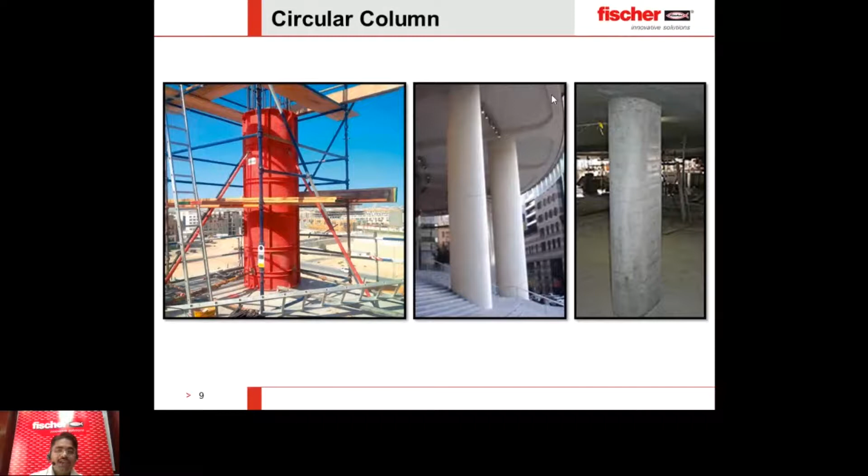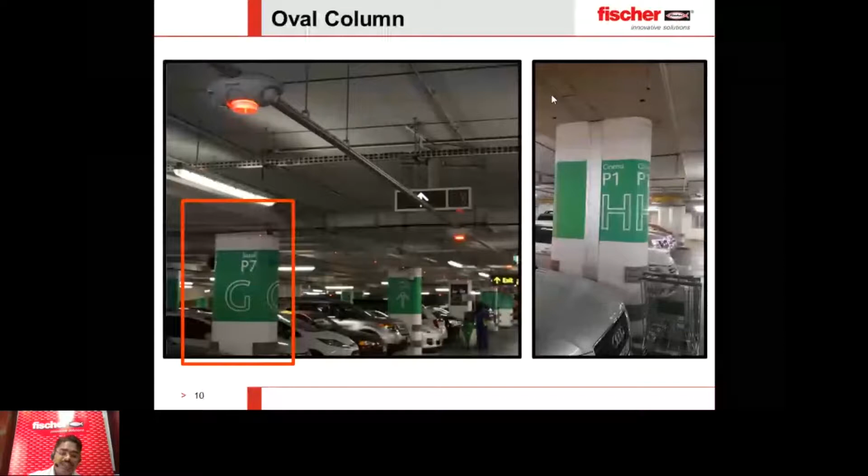But before I start that, I want to ask you: what type of anchor failure happens under tension? What do you think, guys? What are the types of anchor failure happening under tension?

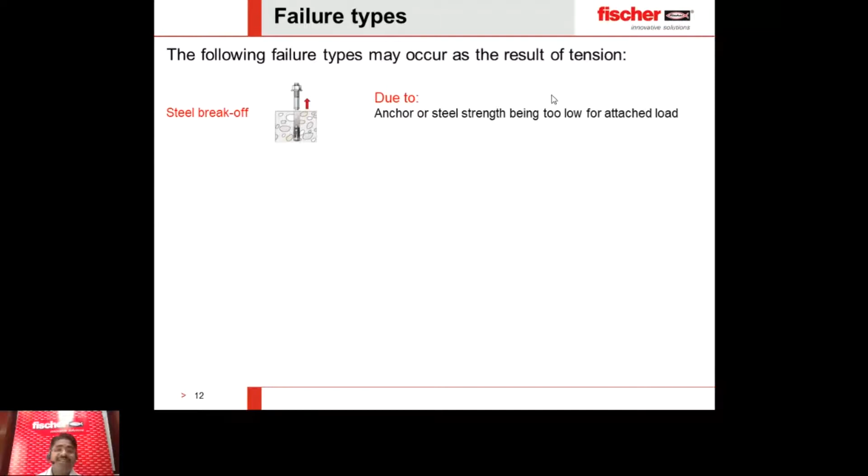Under tension, failures can be steel failure when the load is high and your steel diameter or anchor diameter is very less, then the steel will get failed. There is also anchor pull-off failure, which basically happens because of high load, incorrect installation most of the time, and if there is less bonding strength of the chemical to the anchor or to the concrete.

There is another failure, which is concrete cone failure. Even if our anchor is strong and steel diameter is big, if your concrete strength is very less, then concrete cone failure happens. Basically, the anchor comes out with a part of the concrete.

And there is splitting failure for thinner members. If you are using a very thin member and using anchors over there, when the load comes, the member itself gets split.

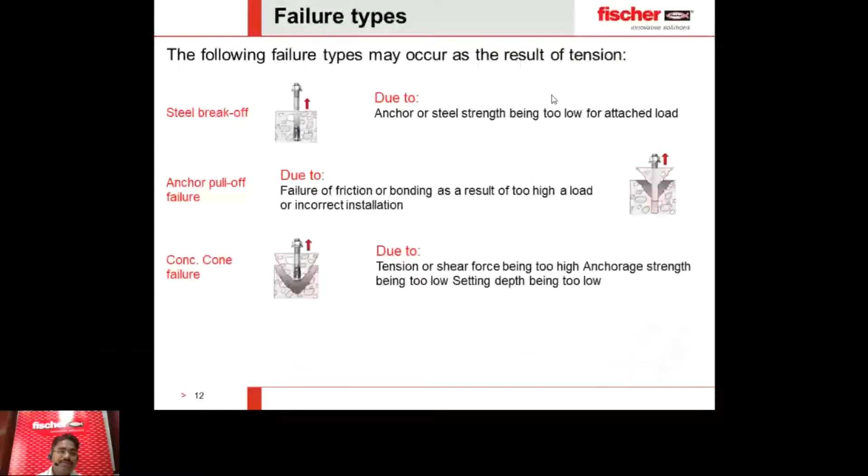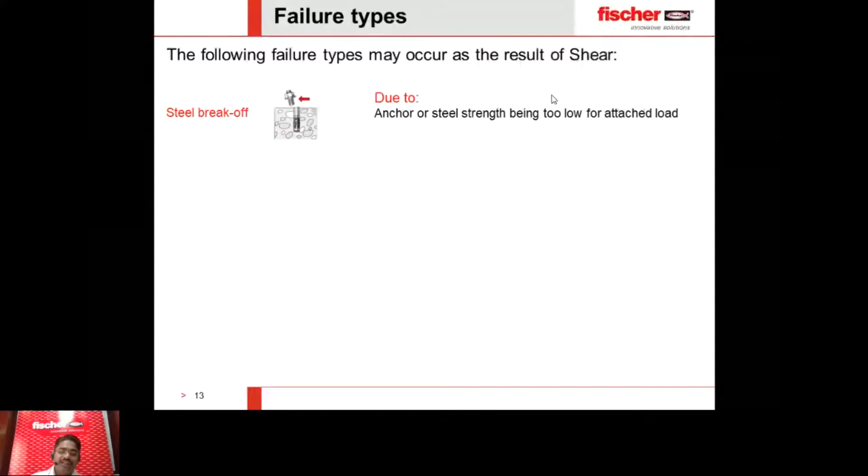Now, what is the failure type for shear? This is a very basic thing; we are going to discuss more deeply how we can find solutions for these problems. There is steel failure again - if the diameter is smaller than the required diameter, then the steel is failing.

Concrete pry-out failure - in the formula or theory, it's mentioned that it's based on anchor pull-out failure under tension, or the pull-out capacity. It depends on the pry-out capacity. So again, if anchor pull-out failure is happening, there's most chance the pry-out failure will occur too.

And concrete edge failure - this happens if the anchor is very near to the edge, for corner fixing. If that's the case, then concrete edge failure happens. So how we can avoid it and get a better solution, we will discuss in our future slide.

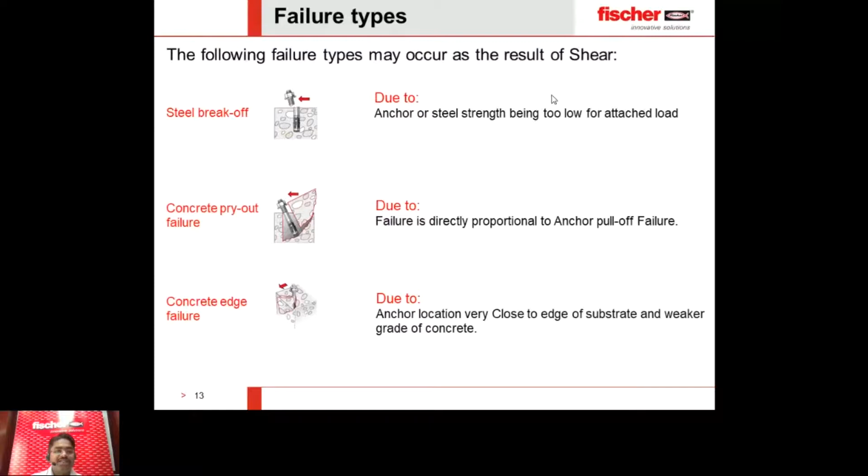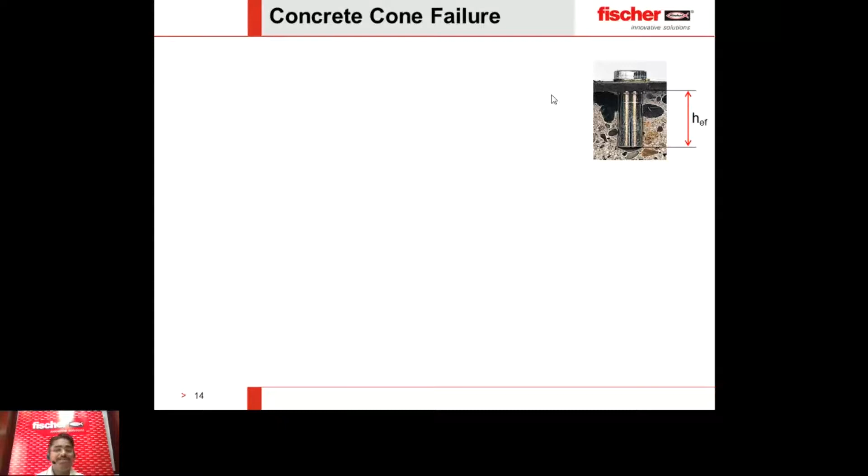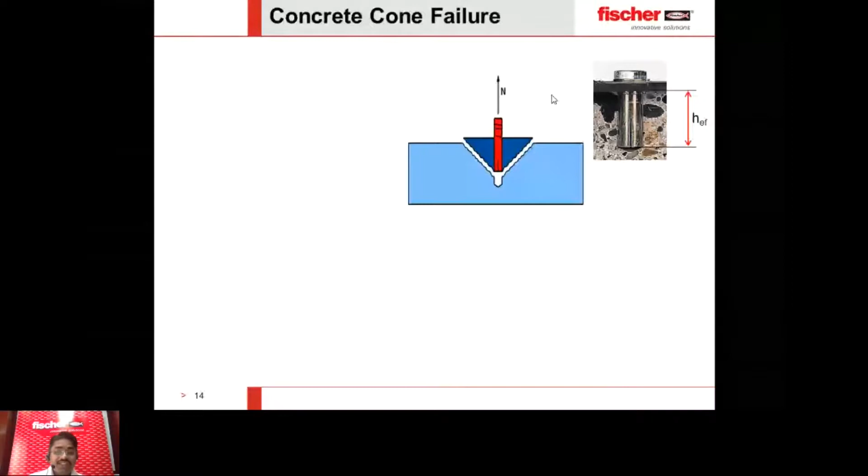So what is concrete cone failure? We know how an anchor works - it's basically embedded inside the concrete and then bolted from the top. The part embedded inside the concrete is called the effective embedment depth, in terms HEF, meaning H effective, or embedment depth. So when there is tension, if the concrete is weak but the anchor is very strong, then the concrete gets failed and comes out. What is the dimension of this concrete, how does it get failed?

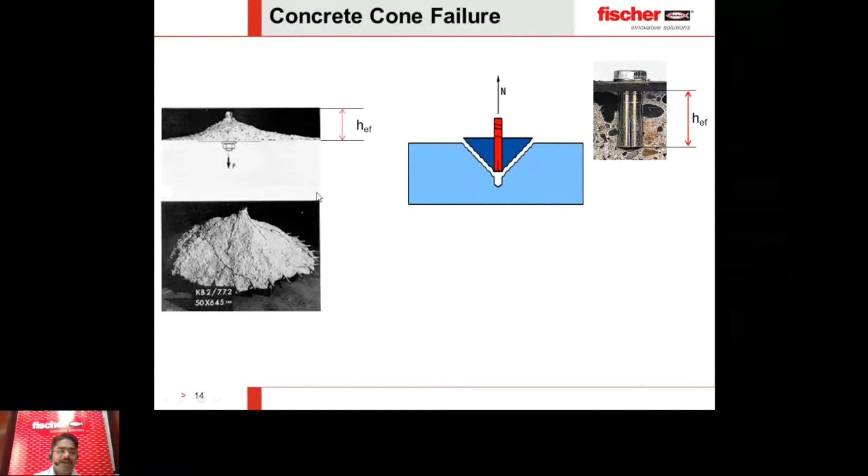This is a real picture of concrete cone failure, how it looks like. This is the embedment depth from the surface of the concrete till the end of the anchor - the effective embedment depth. Then the concrete surface, which makes the cone, or the cone surface, is 3 times the embedment depth. So if you have an embedment depth of 100 mm, you will have the diameter of the cone as 300 mm.

This is the theory, or the formula, for concrete cone failure. This is a constant value for cracked and non-cracked concrete, K1. This is FCK, the compressive strength of the concrete, and the embedment depth, HEF, to the power 1.5. So basically, concrete cone failure depends on the strength of the concrete and the embedment depth.

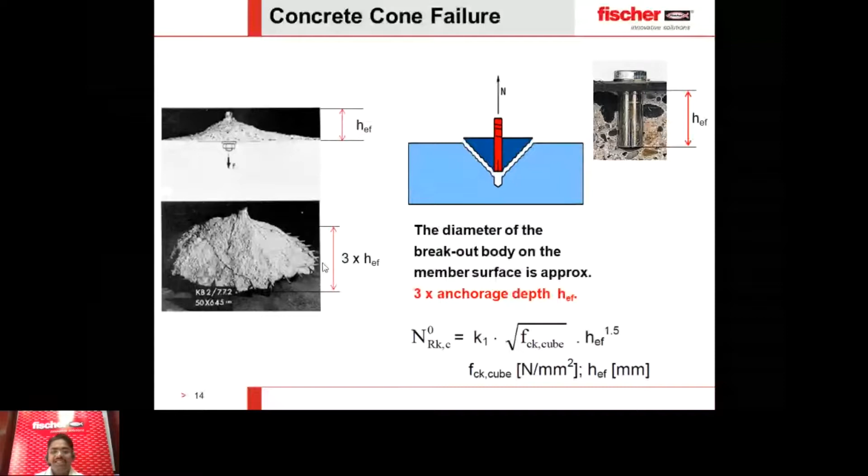What is characteristic spacing and edge distance? To get 100% capacity of the anchor in terms of concrete cone failure, you should keep the distance between two anchors as 3 times H effective, or 3 times the embedment depth. Then you will get 100% capacity of each anchor. If it is lesser - in the actual case it's not always possible, because when you have embedment depth of, say, 100 mm, you'd need spacing of 300 mm, which in actual site conditions is sometimes not possible. So as the spacing gets closer, the reduction factor starts working.

There is edge failure, which occurs at 1.5 times H effective. You can see here in the picture - this is the cone, so half of the cone is 1.5 times H effective. If the anchor is 1.5 times H effective far from the edge, then there will be no influence from the edge - which is sometimes not possible to keep on site. So let's see how we can make it possible and what will be the solution for it.

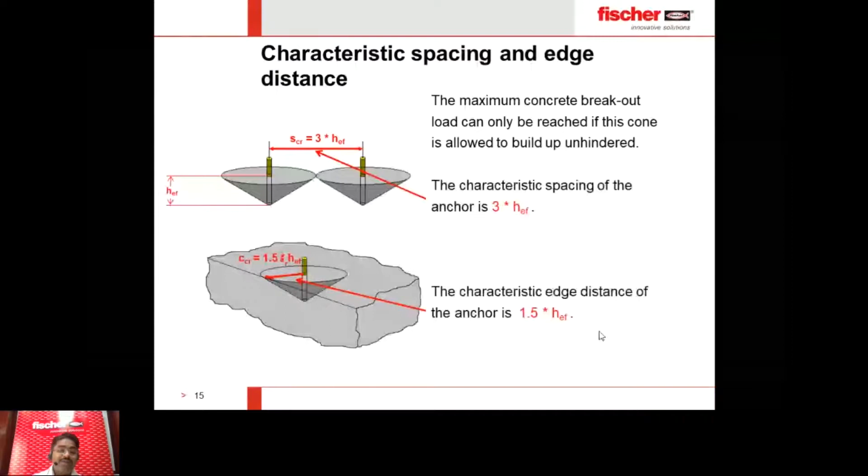Before that, I also want to talk about what is the anchor capacity influencer here. These are the anchor capacity influencers: even if the anchor is the strongest one, if your member width is very small, the anchor capacity reduces. Member thickness governs the splitting failure, so it also influences anchor capacity.

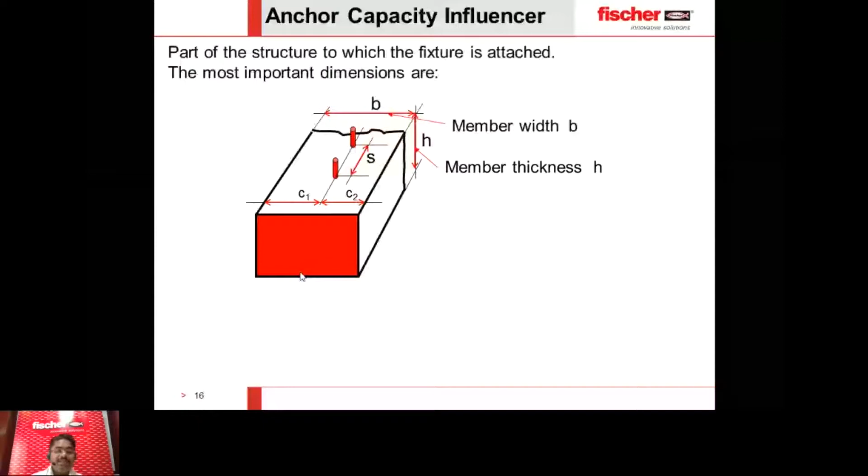Spacing between anchors, we already discussed how spacing influences anchor capacity. And edge distance is much more critical. If the edge distance is very small and you have a shear load, there will be a chance of edge failure. Anchorage depth is also playing a vital role in terms of edge failure, pry-out failure, concrete cone failure, all of this.

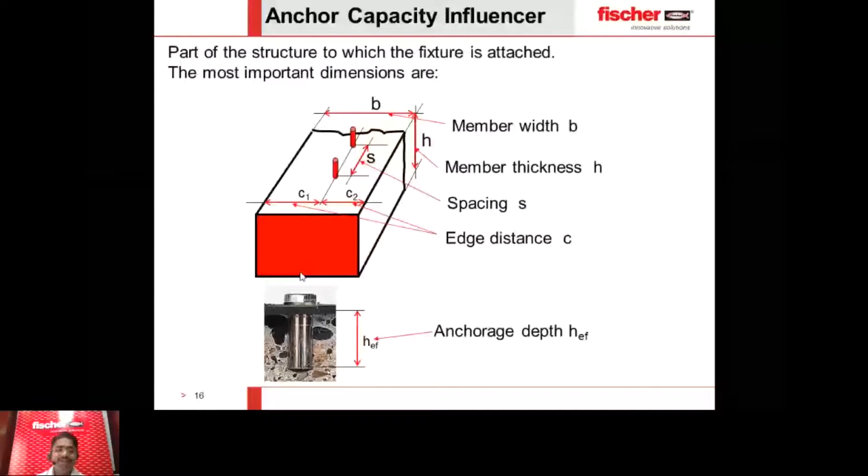So let's go towards the case study: fixing a steel beam on a curved column. It can be steel beams, or any kind of base plate you are fixing on a curved column, but how should the approach be, how will it be solved, and what is there.

Basically, there was a parking area in UAE, a project I worked on. There was parking on the first floor and parking on the second floor. But as this is a busy mall, the parking usage increased, so they wanted to introduce an intermediate slab in between. There will be some I-beams connecting from one column to another column, and then there is an intermediate slab, which can also be used as a parking lot.

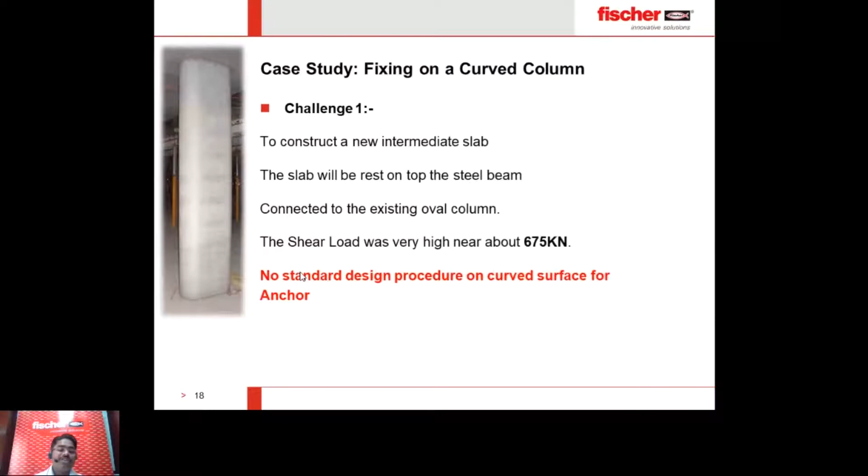Now, when we approached them and found the shear load for this beam connection to the column, it's coming to 675 kilonewton, which is 67.5 ton. It's a huge force, right, guys?

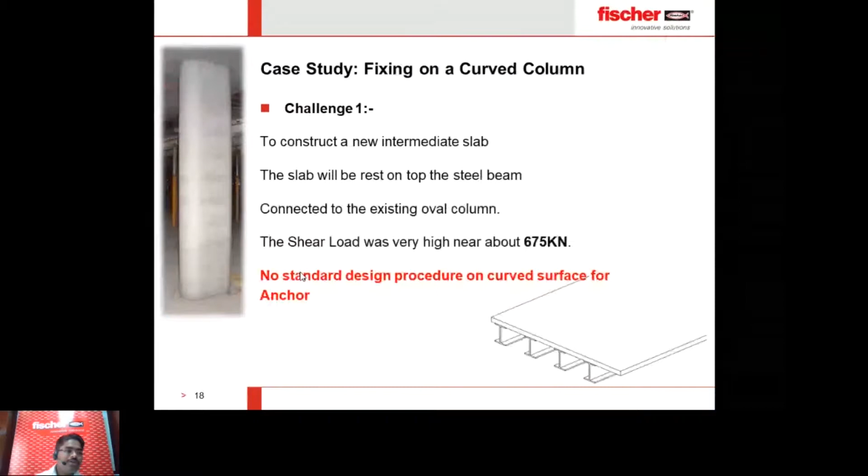Now, when we tried to approach a solution, we found there is no standard design procedure for the curved surface. How will we do the design calculation? Standard design calculations are always for a flat surface. So we came up with some engineering judgment and a solution.

What is that? So our first proposal was: this is a circular column. Now this is the cross section where you can see the anchor in green color. Let's say it's 85 mm embedded, and from one anchor end to another anchor end it's 90 mm. You can see it's a concentric anchor, because on the curve column, if you have to keep the anchor perpendicular to the surface, it's always concentric towards the center of the column.

So it can be circular, it can be oval also - oval is also part of the circle. So I am talking about basically the curved surface, how we'll do this. Here you can see the concrete cone forming, and the concrete cone is making a common area which is 3343.8 millimeter square with this particular dimension.

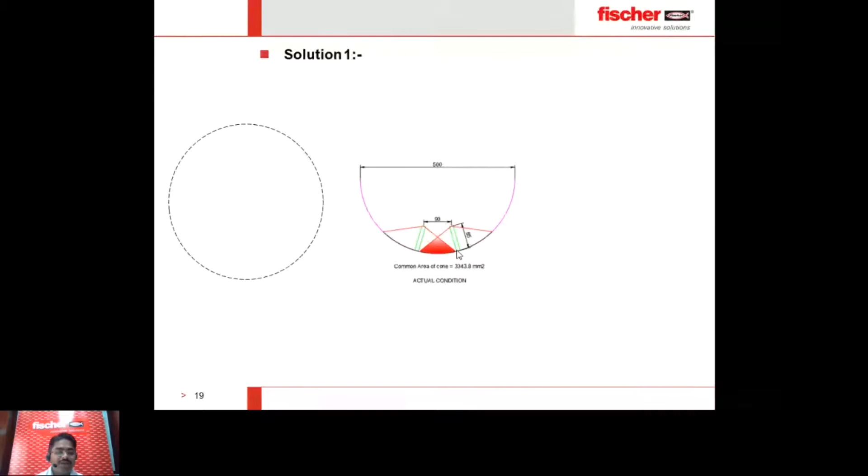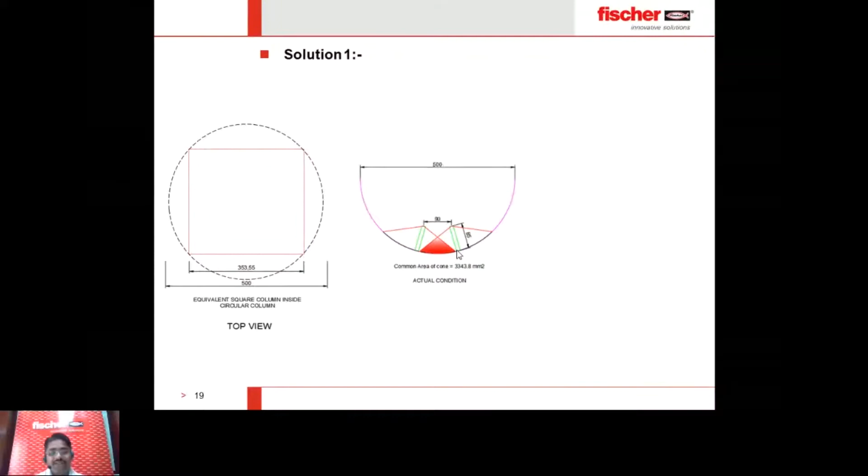Now we thought we will not go for that; we will go for a more conservative method so there will be no failure. To make sure of that, we consider a small square inside the circular column, and we consider there will be a straight anchor design. In actual case, the anchor will be concentric, but in the design method, to make it more conservative, we kept spacing of 90 mm on the flat surface, and I took the square column because the square column has limited edge, as well as giving more common area for the cone.

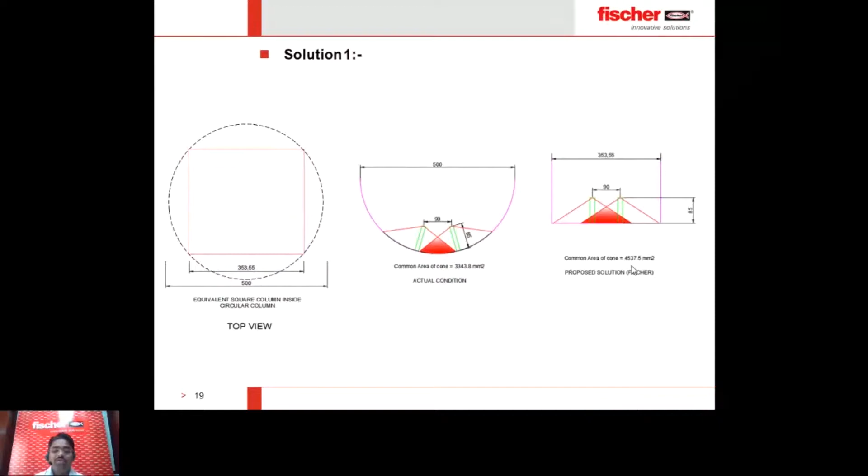As you see here, the common area for two cones is much more compared to here, and I found its common area is 4537.5 millimeter square, which is almost 1.4 to 1.5 times. So for solution one, why did we go with the square concept? Because there is limited edge, whereas for the circular surface there is no limited edge, it's basically a continuous surface. So there is limited edge in the square column, and the design is much more conservative.

But we face a problem. Remember there was a huge shear force, 675 kilonewton. When there is 675 kilonewton of shear force, what will happen? It will break the edge - edge failure will happen. And this is a column which is really high strength for a big building, consisting of so many reinforcements. So how can we approach this in a much more real way?

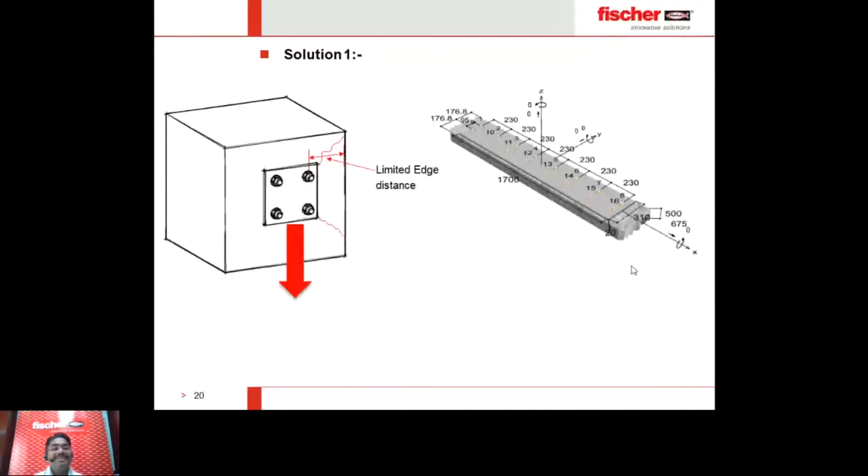We started thinking about it, and we found a solution which can be something like this. What is this? Okay, this is the real case scenario. Actually, we did a finite element design for the base plate with nodes mentioned as the anchor.

When we put the load on the finite element design for the base plate, we found some load coming on the anchor. This anchor load, we took every anchor load and did the design for a single anchor. Why? If the cone is not making a common area for failure, you can take the single anchor capacity as 100%. So from one anchor to another, I kept the distance as 3 times H effective, meaning there's no common area for the cone influencing each anchor capacity.

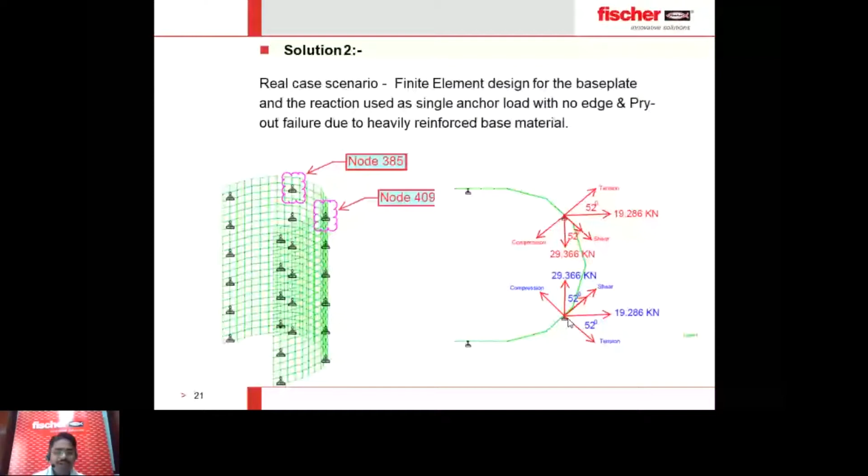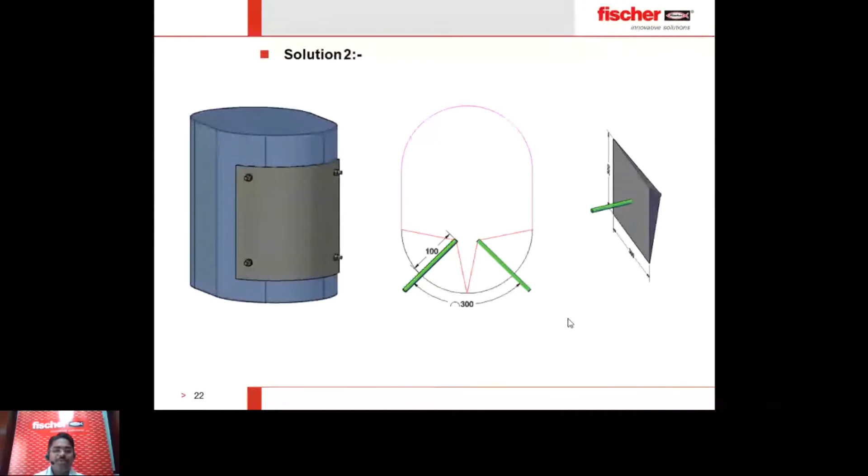So I went with a solution like this: there's a base plate, and going inside the concrete, it's basically a trial and error method. You go 100 mm deep, and it gives you a certain load capacity. Based on that, we do the finite element design, keeping 300 mm spacing between anchors, and check if the action load is exceeding the capacity or not. If it is, we increase the embedment depth to maybe 120 mm or 150 mm, and cross-check again with 150 mm, 450 mm spacing. Based on this we found the solution and got it approved - an awesome landmark milestone for us. Both consultant and contractor approved it, and I feel this is the best approach for curved surfaces: increasing embedment depth and keeping spacing between two anchors as 3 times H effective.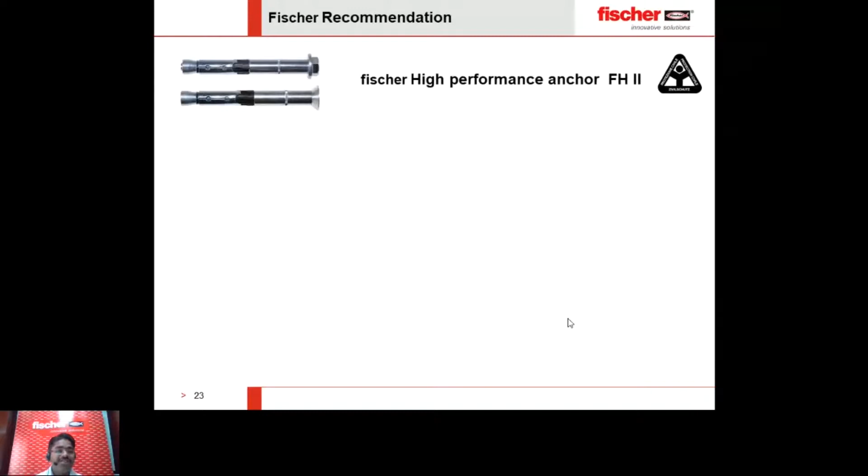Our recommendation for this anchor is the high performance anchor FH2, which has shockproof approval and better shear capacity because it's a sleeve anchor. If this anchor doesn't work, there's Fischer Superbond FIS SB390S, which is a hybrid mortar. It can work for short-term temperatures of 150 degrees centigrade. If there's any provision for temperature, you can go with this anchor. This is also fast curing.

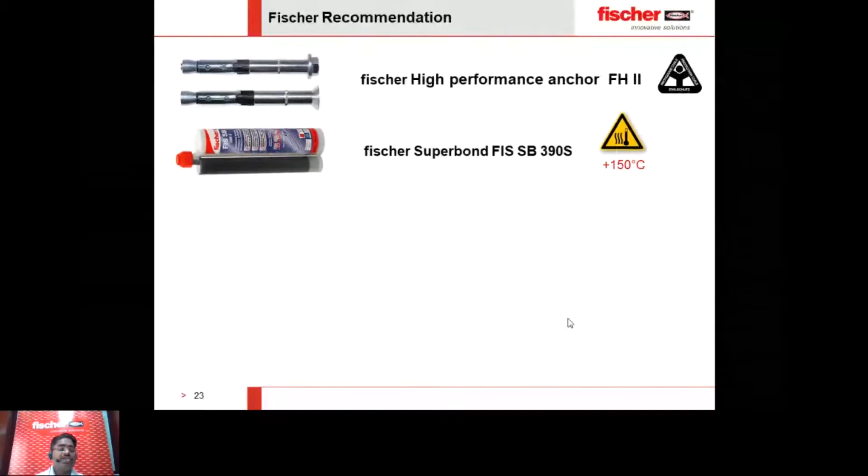There's also Fischer epoxy mortar, which I want to suggest - it's the best epoxy mortar in the market till now. It takes much more load, and the capacity of this anchor is very high. It's approved for a 120-year service life guarantee. This chemical is slow curing, so if you have much more embedment depth, you can go with this chemical.

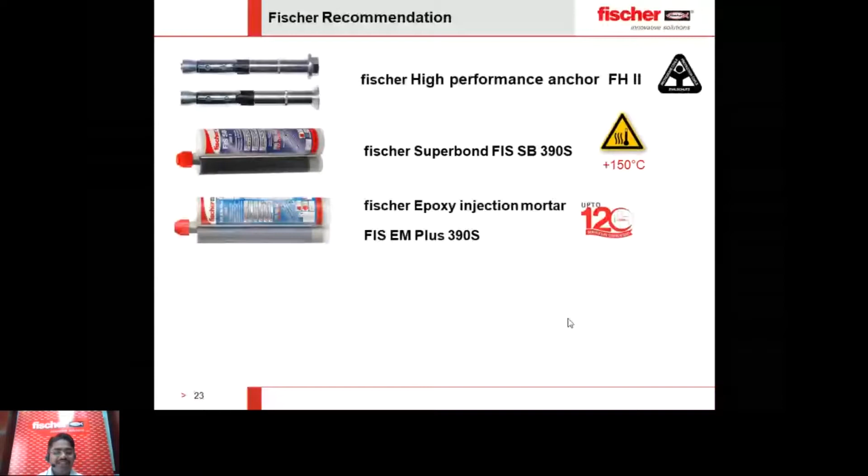And last but not least, to complete the limitations of the anchors - the most superior or most advisable for this particular application is the Fischer High Bond anchor. It's a high strength chemical anchor, and it really requires less edge distance and less spacing if you're doing design for other cases as well.

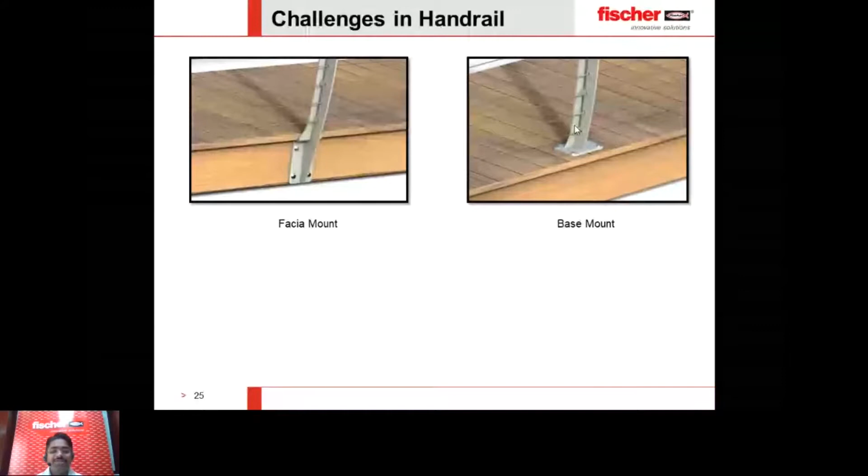Now our second case study: the top edge of the slab fixing bracket. Why do you fix a bracket on the top edge of the slab? For fixing handrails or guardrails, something like that. There are two types of fixing for handrails naturally happening: either fascia mount, which is fixing on the face of the slab, or base mount, which is fixing on top of the slab. When there's high shear load or high tension load, sometimes structural designers go with a solution that looks like this.

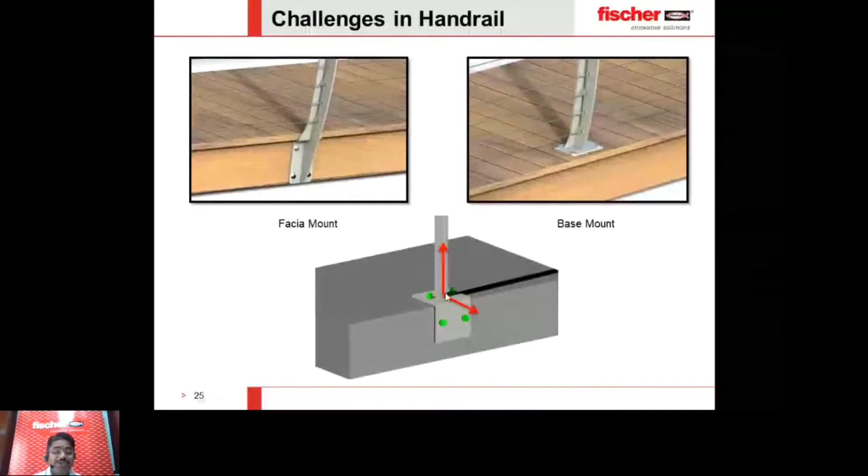Agree? When you go with a solution like this, the problem we face is this L-shaped base plate. This anchor is working both in tension and shear, and this anchor is also working both in tension and shear. How do we resolve this? This is a big challenge for high tension force or high shear force, as well as being near the edge of the concrete. How will we resolve this problem? Let's see.

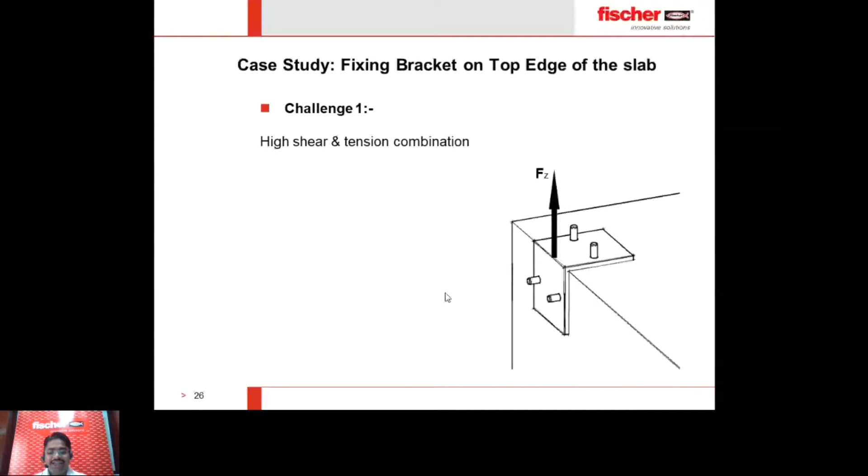This is the tension and shear combination I talked about just now. If there is vertical load, upward load as tension on the handrail, you are going to get tension on this anchor and shear on this anchor. So basically this anchor will be under tension because of this load, and this anchor will be in shear at the same time. So this edge becomes weaker in terms of cone and edge failure. We will come to the analysis. And when there is Fx working, there is tension in this anchor and shear in this anchor. So again, this edge is becoming worse in terms of Fx.

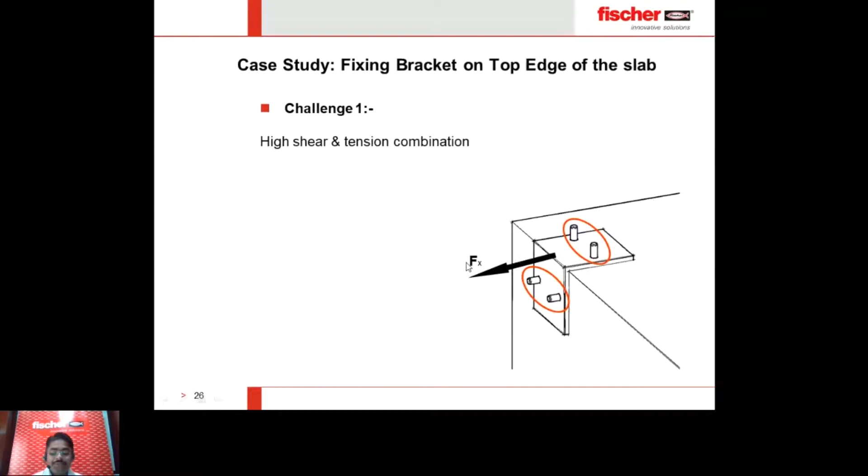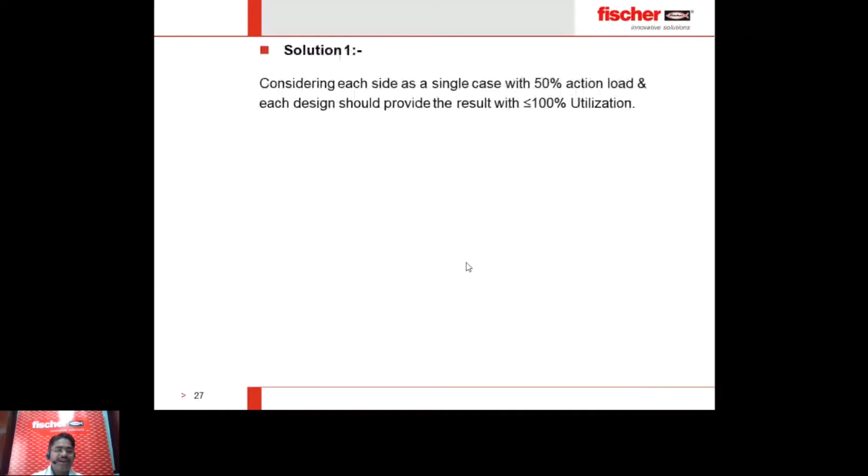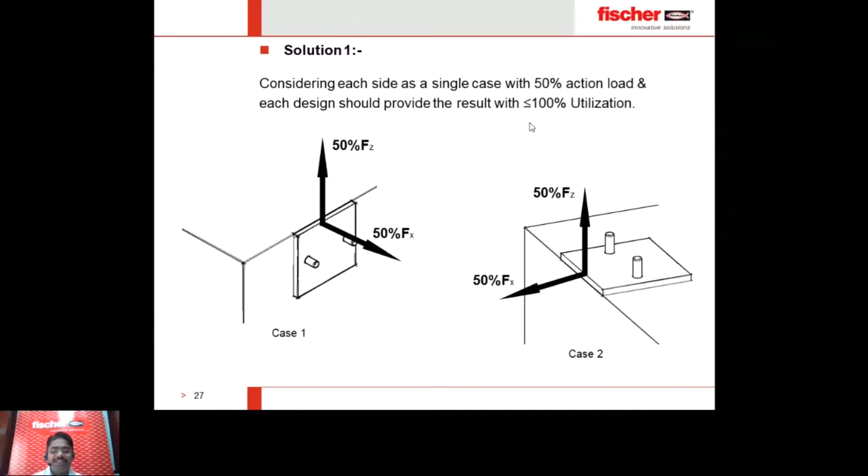Now, what is the solution? The solution is something like this. You take case 1 as there is one base plate, no other base plate. Put 50% of your horizontal load and 50% of your tension load, and go for the utilization less than 100%. So this anchor is now working as shear and tension both. At the same time, in case 2, you have to check also the top plate will have 50% of shear and 50% of vertical upward tension load. So based on that, your utilization has to be less than 100%, and you might find a solution. But this method is not really conservative.

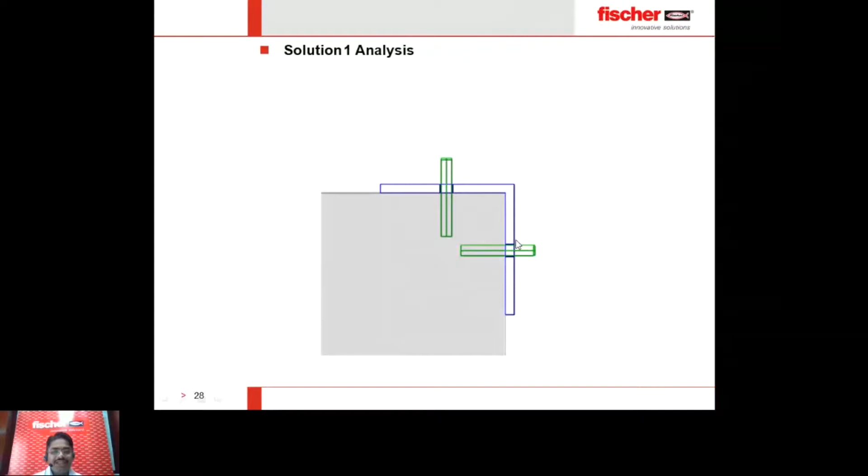Why? Let's go for a small analysis. This is 2 anchors. When there is this 2 anchor setup and vertical upward force Fz working, this is what's happening in the actual case. This anchor is under tension and this anchor is under shear, which is really worse. What is happening? This tension anchor is making a cone and this shear anchor is making edge failure, where the concrete area goes into a common stress area. It's getting common stress area, meaning it's getting worse in this kind of case.

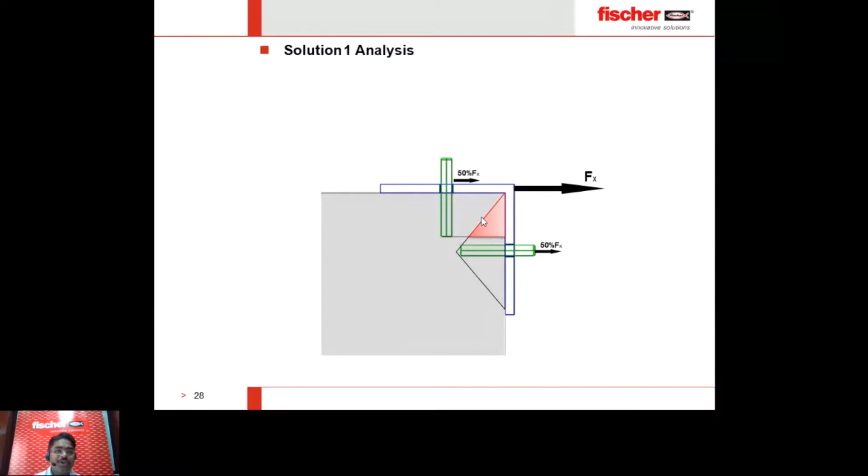Now when there is shear in the base plate, you will find shear on the top bolt 50% and 50% tension on the side face bolt. Again, the tension bolt is making the cone and the shear on the top bolt is making the edge failure. Again, the common concrete area is coming. How can we avoid this? Or if you are not avoiding it, you are going to face the problem. How can we make sure this concrete is not overstressed, which is not possible with 2 different designs. So how can you avoid it?

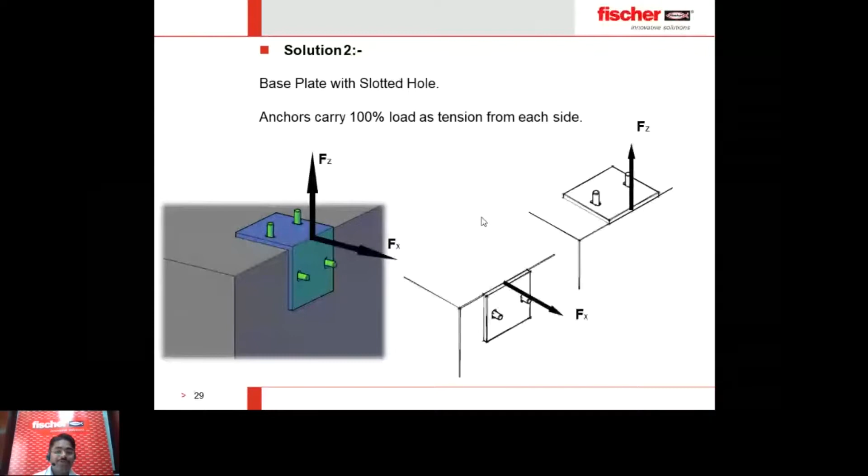So the problem came, and now solution number 2 came into the picture. We thought about it and came up with a small solution which is acceptable by the contractor and consultant. The base plate will have a slotted hole, which will really help give zero shear to the parallel plate. How does it look like? Let's see. When there is Fx working, the top plate is taking zero shear. Full tension is coming to the side plate. And when there is Fz working, the side plate is taking zero shear and full tension is coming to the top plate. Let's go for a small analysis for it.

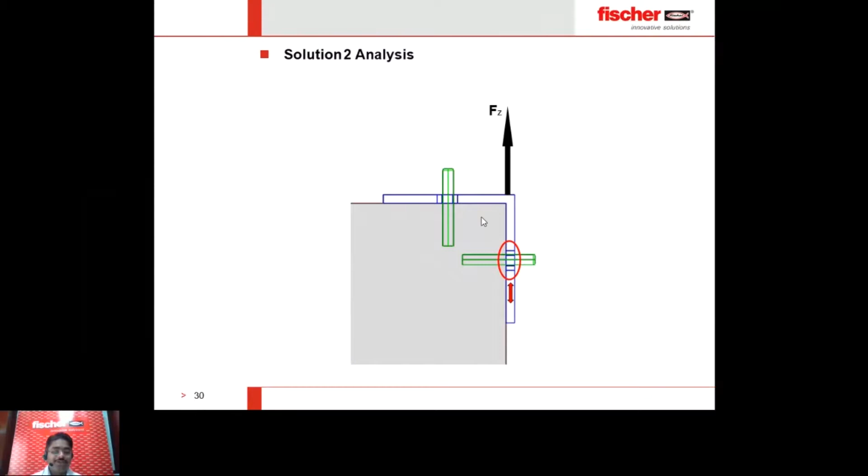When you are having Fz, that time you will have this slotted hole in the side face of the plate. Because of the slotted hole, it is not transferring any shear to the anchor. And 100% tension is going to the top face of the bolt. That time, this top face of the bolt is making only a cone, or the only check that has to be done is for the tension on the top face of the plate.

When there is horizontal load Fx, you will find this slotted hole on top as well, which is not allowing the shear to transfer to the bolt. So there is 100% tension working on the side face of the bolt, where we can search for the solution and we will find it. It's automatically working based on the tension. So the slotted hole is going to make your life easy in terms of shear. There will be no shear working, so there will be only calculation for 100% tension on this bolt for the horizontal load and 100% tension for this bolt for the vertical load.

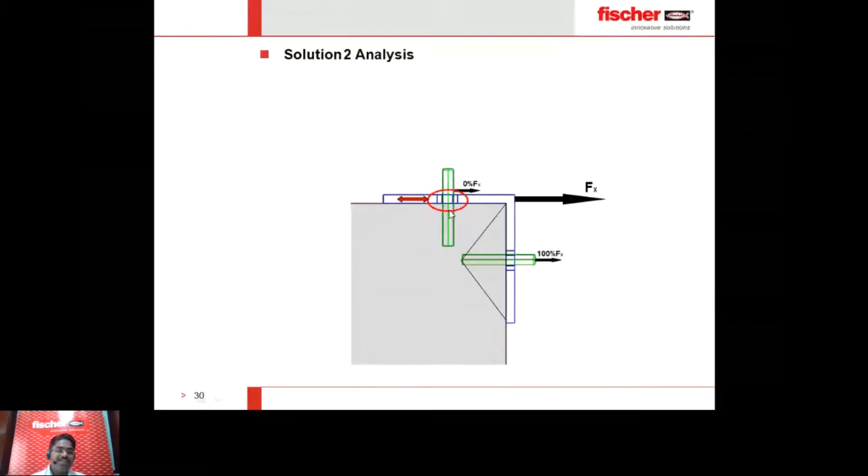So what does Fischer recommend for this? Fischer recommends the Fischer anchor bolt FAZ2, which is available with the dome nut also, which is good in looks. This is a friction controlled anchor, so it's basically working based on the friction principle.

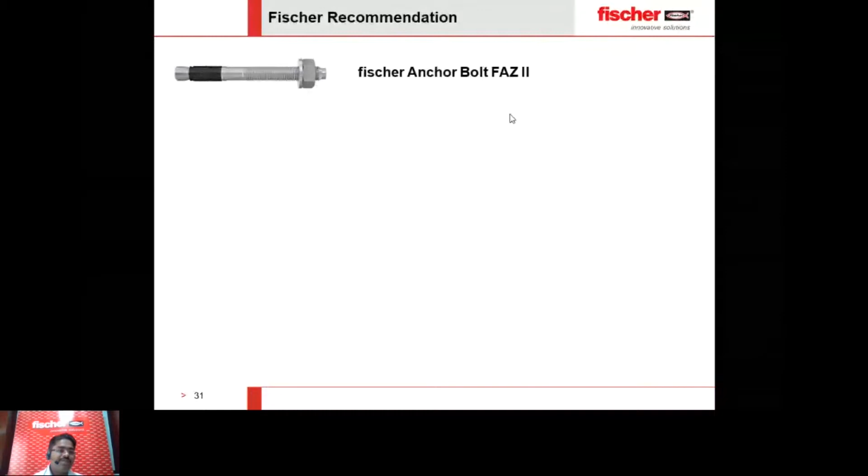This is Fischer concrete screw FBS2 Ultracut, which is basically working based on mechanical interlock. It's cutting the concrete and going inside. So this anchor is really not giving any stress to the concrete to get installed. So you can have very less edge distance with this anchor FBS2 Ultracut, and it's having very good shear capacity as well as tension capacity.

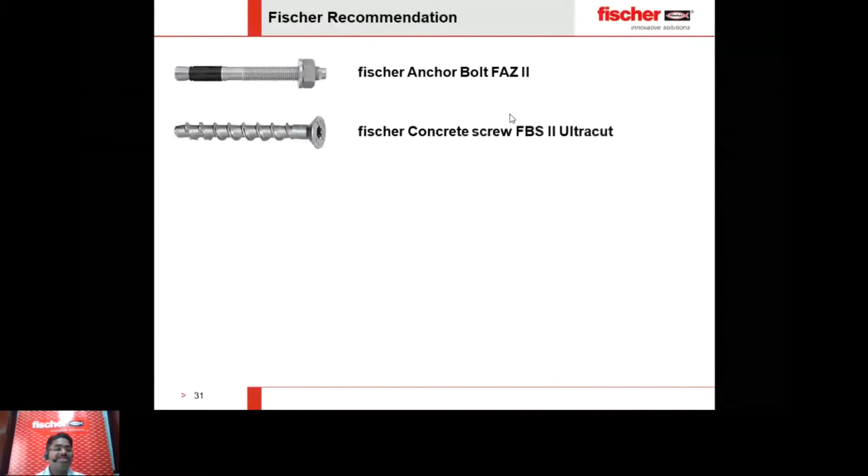I will propose you injection mortar, which will allow you to go as much as possible inside the concrete, or as less as possible, because this is variable. It is an injection mortar. So based on your load, you can decide to go with chemical anchor or mechanical anchor. Both options we do have.

And as I told you, this anchor is having 120 years service life guarantee. And last but not least, Fischer High Bond, also it's a very good anchor. In terms of chemical anchor, it can be installed very near to the edge, and the spacing also required less than any other chemical anchor. So if the load is very high, you can go with Fischer High Bond FHB2.

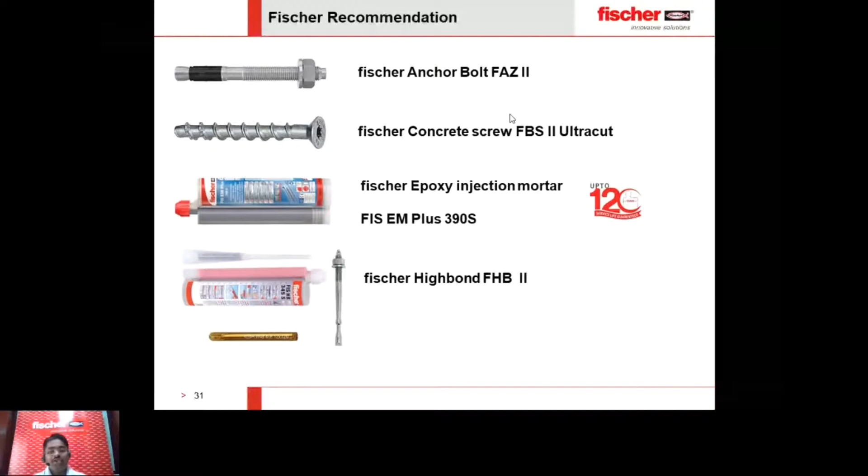So in this software, you can do all of that design. Only the approach has to be changed, from a technical point of view, and then from the normal anchor design software, we can do the anchor design. Just to tell you, all the solutions which we talked about today are based on Fischer experience, our trial and error method, and we found this is, based on engineering judgment, the best way to find the solution.

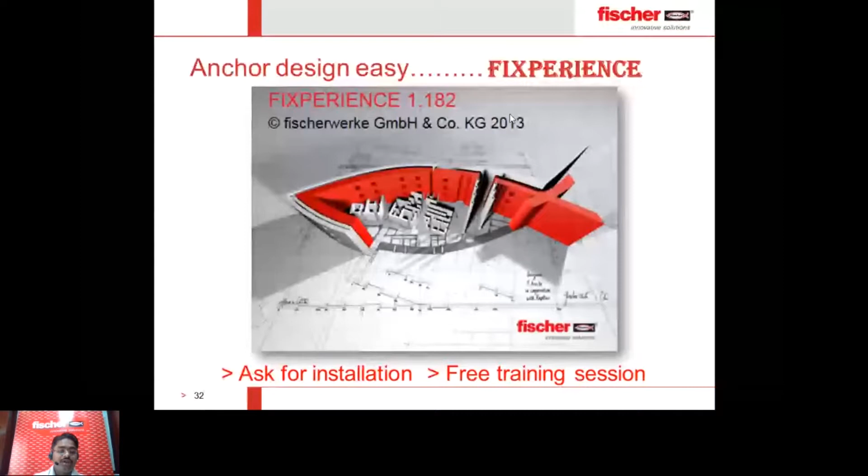Giridharan, hi. You ask a question: anchoring in top edge of slab after providing the slot, what should be the minimum edge distance to be followed? So as to avoid the cone failure, I know it's 1.5 times H effective, but what if the geometry is limited? How to reduce the tension capacity based on the overlapping of cone?

Giridharan, I just want to tell you, every anchor is having a minimum edge distance mentioned in the ETA approval, relevant ETA approval for the anchor. You can find anytime on our website. If you visit fischer.ae and go for the relevant product, you can find the ETA approval. You can get from there, as well as how the reduction of the tension capacity is happening for the cone failure. As you asked, cone failure tension capacity, there is a reduction factor, it's gamma spacing, so it's again based on the ETA. In the ETA approval, it's clearly mentioned how to get the gamma S. If you need much more support, please contact us. I will be happy to give you the documents, and I will be happy to discuss regarding it.